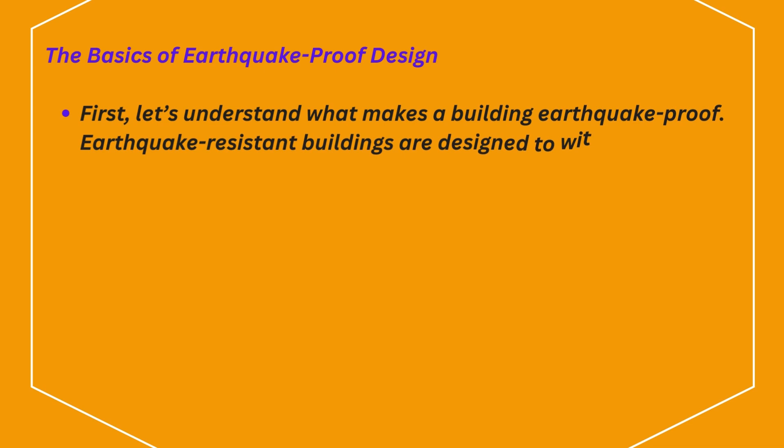The basics of earthquake-proof design. First, let's understand what makes a building earthquake-proof. Earthquake-resistant buildings are designed to withstand seismic forces through a combination of smart engineering and advanced materials. Key features include flexible foundations, which allow buildings to absorb and dissipate seismic energy.

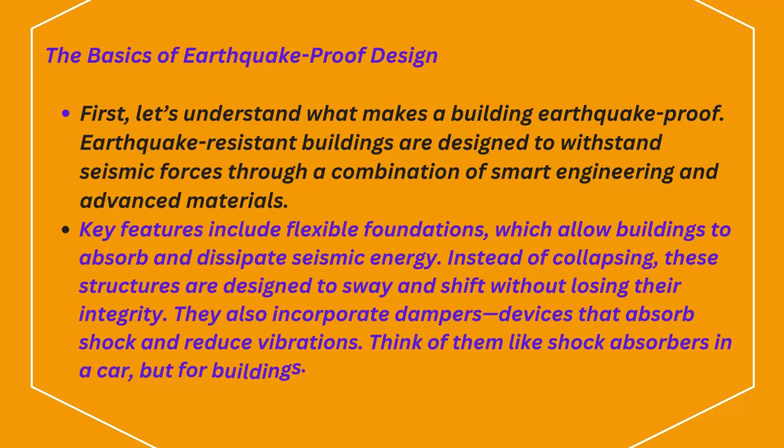Instead of collapsing, these structures are designed to sway and shift without losing their integrity. They also incorporate dampers, devices that absorb shock and reduce vibrations. Think of them like shock absorbers in a car, but for buildings.

Advanced technologies for recovery. But being earthquake-proof is only part of the story. To truly bounce back, buildings must be able to recover from damage and remain functional. Here are some cutting-edge technologies that help buildings recover after an earthquake.

1. Base isolators. These are large, flexible bearings placed between a building's foundation and its superstructure. They allow the building to move independently of the ground motion, reducing the amount of stress transferred to the structure.

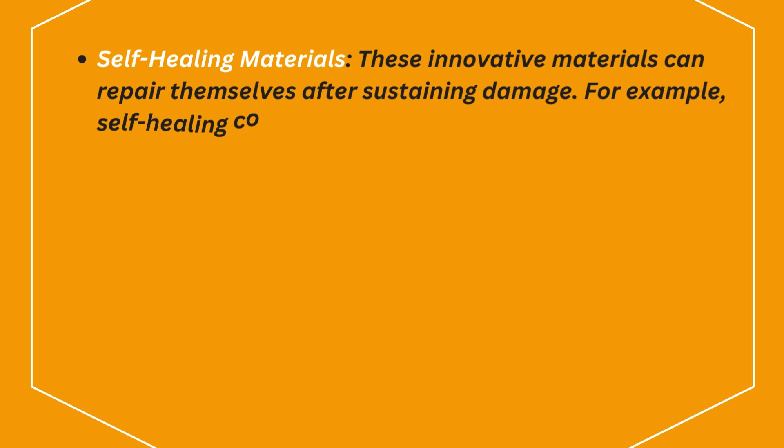2. Self-healing materials. These innovative materials can repair themselves after sustaining damage. For example, self-healing concrete contains special capsules that release healing agents when cracks form, helping to restore the concrete's strength and durability.

3. Post-earthquake reinforcement. Some buildings are equipped with systems that allow for rapid assessment and reinforcement after an earthquake. These systems can detect damage and automatically deploy additional supports or reinforcements to ensure the building remains safe and functional.

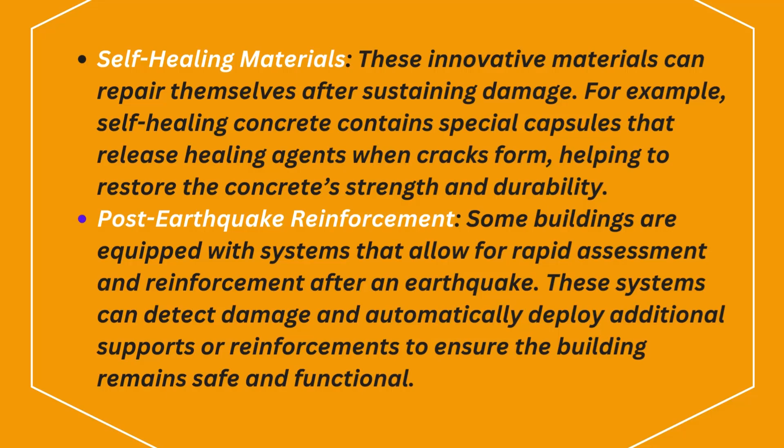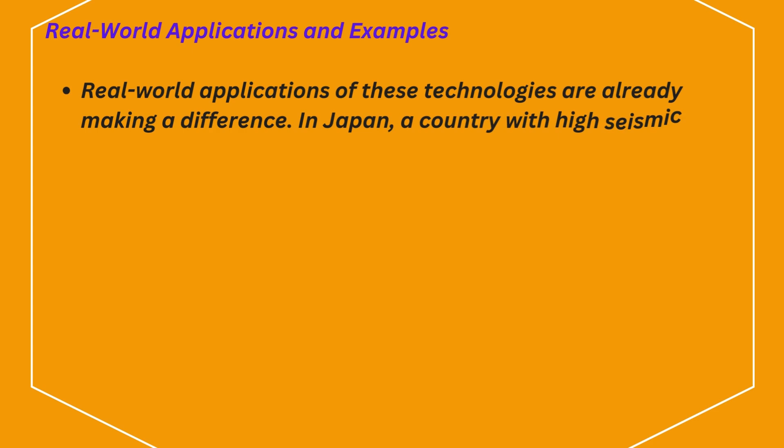Real-world applications and examples. Real-world applications of these technologies are already making a difference. In Japan, a country with high seismic activity, many buildings are designed with base isolators and advanced damping systems. The Tokyo Skytree, for example, is equipped with a massive damping system that helps it sway safely during an earthquake.

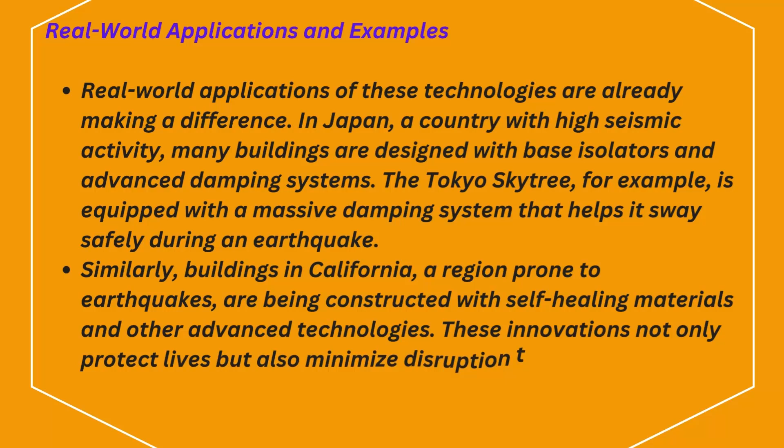Similarly, buildings in California, a region prone to earthquakes, are being constructed with self-healing materials and other advanced technologies. These innovations not only protect lives but also minimize disruption to businesses and communities after a quake.

The future of earthquake resilience. The future of earthquake resilience is promising. Ongoing research is focused on developing even more advanced materials and technologies to enhance building recovery.

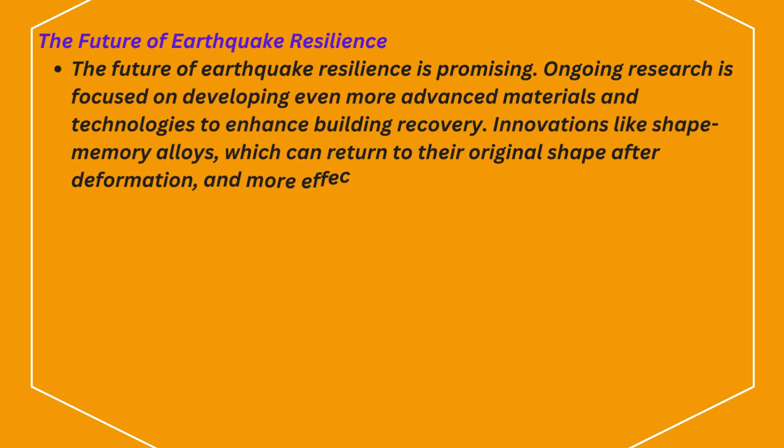Innovations like shape memory alloys, which can return to their original shape after deformation, and more effective early warning systems are on the horizon. As we continue to improve earthquake-resistant technologies, we're moving closer to a future where buildings can not only withstand but also quickly bounce back from the impact of earthquakes, making our cities safer and more resilient.

So there you have it. Earthquake-proof buildings are not just about surviving the quake, but about bouncing back stronger than ever.

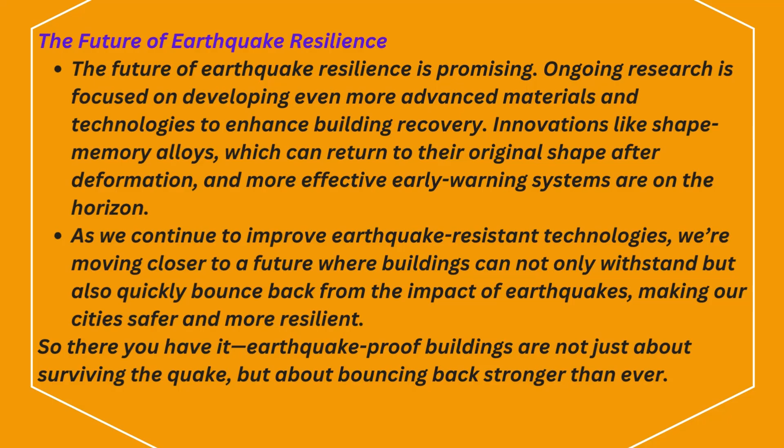Today, we're going to break down the key differences between two popular slab systems in building construction: flat slabs and two-way slabs. Both systems have their strengths and weaknesses, but which one is right for your project? Let's find out. First, let's talk about structural design.

In a flat slab system, the slab is directly supported by columns, without the use of beams. This allows for a simpler and cleaner ceiling design. However, since there are no beams, flat slabs rely on thicker concrete and larger column heads, or drop panels, to distribute loads effectively.

On the other hand, two-way slab systems use beams that connect columns, and the slab rests on these beams. The load is transferred in two directions, both along the length and the width of the slab. The presence of beams means the slab itself can be thinner, but the ceiling design may be less aesthetically flexible due to the beam projections.

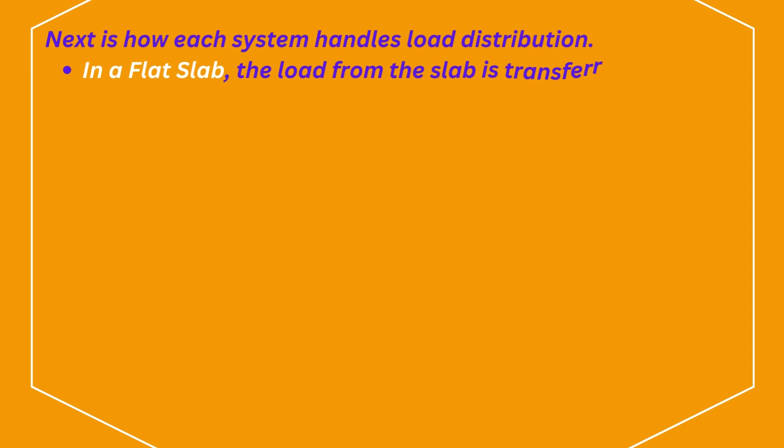Next is how each system handles load distribution. In a flat slab, the load from the slab is transferred directly to the columns. Because of this direct load transfer, flat slabs need to be thicker or require the addition of column capitals to prevent punching shear failures, especially in areas with high loads. This can lead to increased material usage.

In a two-way slab system, the load is transferred across beams in both directions, which distributes the load more evenly. This leads to a more efficient design for handling heavier loads, especially in multi-story buildings or structures with a grid-like layout. Now, let's talk about design flexibility and space utilization.

One of the main advantages of the flat slab is the freedom it offers for open spaces. Without beams, you have more design flexibility for architectural layouts, especially for offices, malls, or parking garages. You can create large, open rooms without the visual or spatial interruption of beams.

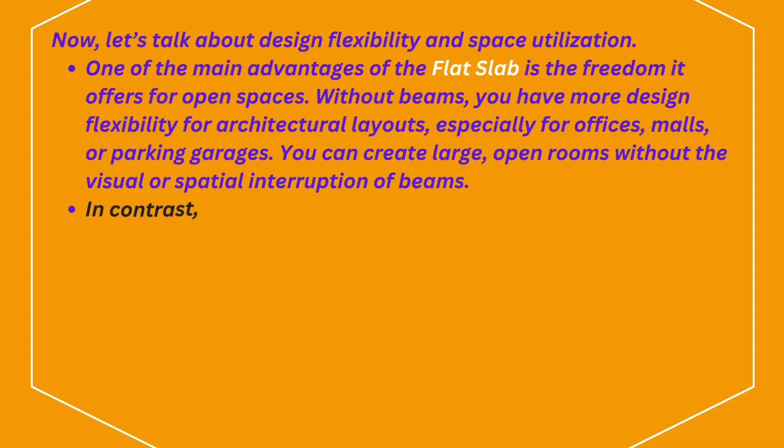In contrast, two-way slabs require beams, which can limit interior space design. Beams create drops in ceiling height and may affect the positioning of utilities, lighting, and partitions. However, the added strength of this system can allow for thinner slabs and a potentially lighter structure overall, which is beneficial in smaller-scale projects or residential buildings.

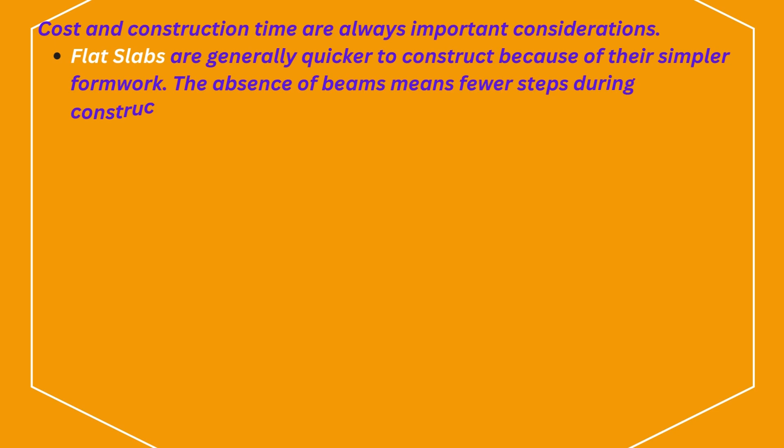Cost and construction time are always important considerations. Flat slabs are generally quicker to construct because of their simpler formwork. The absence of beams means fewer steps during construction, which can reduce labor costs and save time. But remember, the thicker slabs and additional reinforcement may increase the cost of materials.

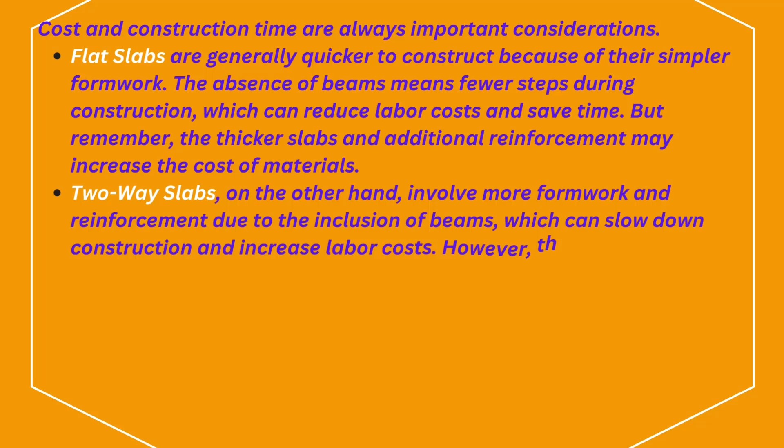Two-way slabs, on the other hand, involve more formwork and reinforcement due to the inclusion of beams, which can slow down construction and increase labor costs. However, the overall material cost may be lower, especially if the beams allow for thinner slabs.

So, when deciding between flat slab and two-way slab systems, it comes down to your project's needs. Flat slabs offer more open space and speed, while two-way slabs give you more strength and cost efficiency in certain designs.

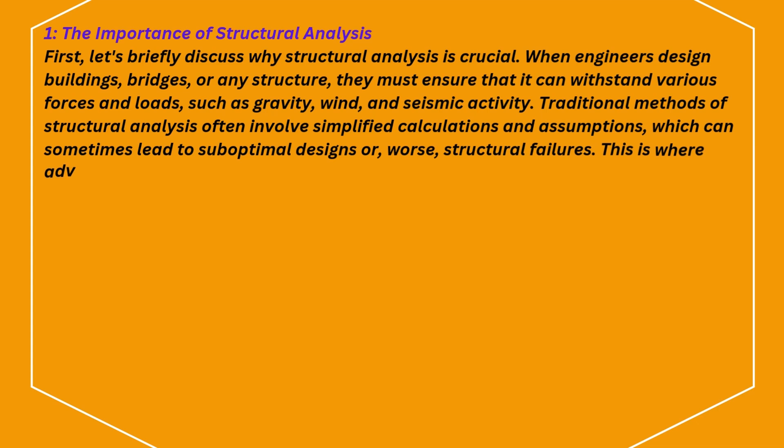1. The importance of structural analysis. First, let's briefly discuss why structural analysis is crucial. When engineers design buildings, bridges, or any structure, they must ensure that it can withstand various forces and loads, such as gravity, wind, and seismic activity. Traditional methods of structural analysis often involve simplified calculations and assumptions, which can sometimes lead to suboptimal designs or, worse, structural failures. This is where advanced simulation tools come into play.

2. What are advanced simulation tools? So, what exactly are advanced simulation tools? These tools include software programs that use finite element analysis, computational fluid dynamics, and other numerical methods to create detailed models of structures. By simulating real-world conditions, these tools allow engineers to visualize how a structure will respond to different forces throughout its life cycle.

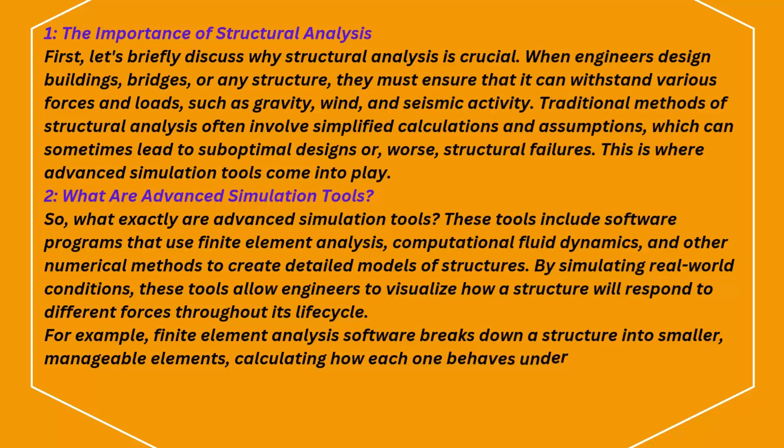For example, finite element analysis software breaks down a structure into smaller, manageable elements, calculating how each one behaves under various conditions. This level of detail provides insights that traditional methods simply cannot offer. 3. Benefits of advanced simulation. Now, let's talk about the benefits of using these advanced simulation tools in structural analysis.

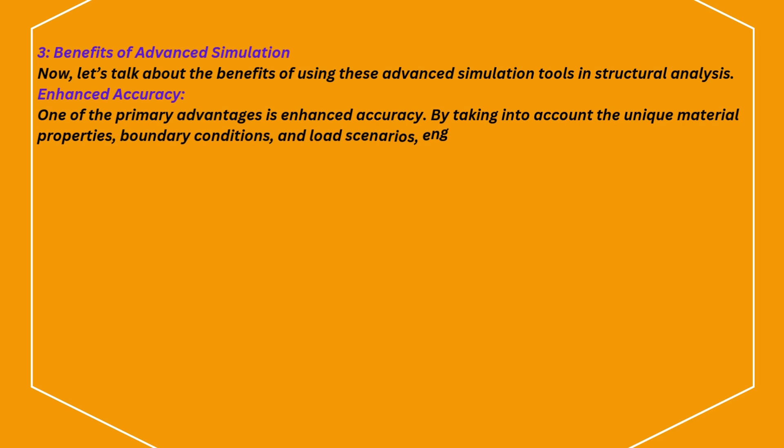1. Enhanced accuracy. One of the primary advantages is enhanced accuracy. By taking into account the unique material properties, boundary conditions, and load scenarios, engineers can make better informed decisions. This leads to designs that are not only safer, but also more efficient in material usage.

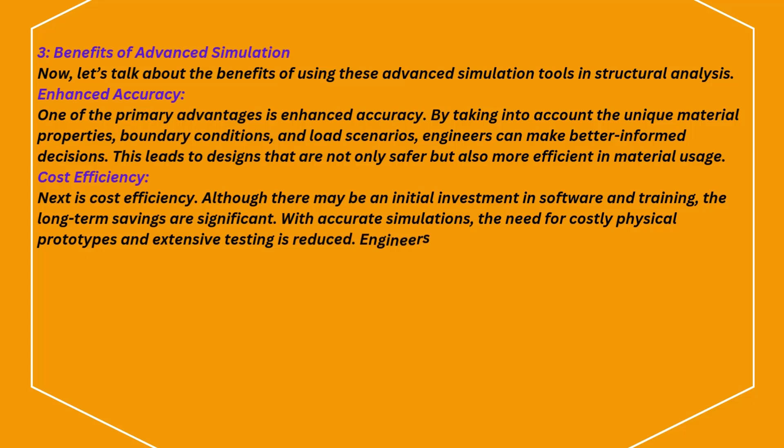2. Cost efficiency. Next is cost efficiency. Although there may be an initial investment in software and training, the long-term savings are significant. With accurate simulations, the need for costly physical prototypes and extensive testing is reduced. Engineers can optimize designs and identify potential issues early in the process, saving both time and money.

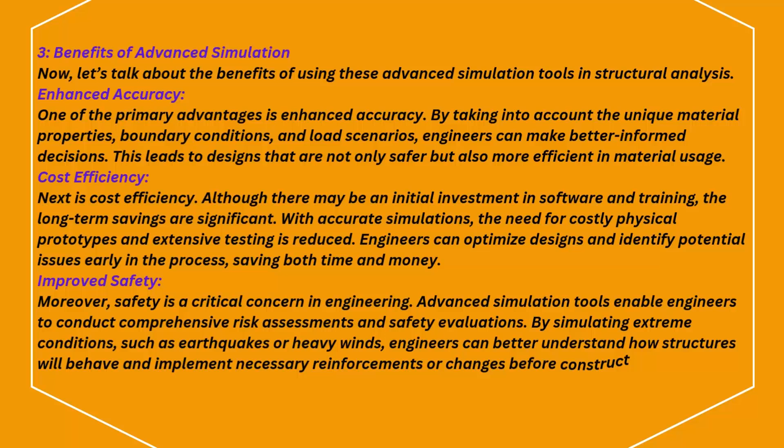3. Improved safety. Moreover, safety is a critical concern in engineering. Advanced simulation tools enable engineers to conduct comprehensive risk assessments and safety evaluations. By simulating extreme conditions, such as earthquakes or heavy winds, engineers can better understand how structures will behave and implement necessary reinforcements or changes before construction begins.

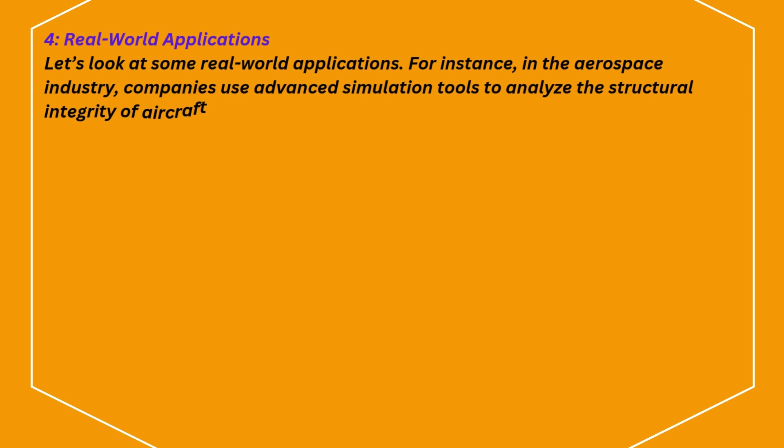4. Real-world applications. Let's look at some real-world applications. For instance, in the aerospace industry, companies use advanced simulation tools to analyze the structural integrity of aircraft components under various flight conditions. In civil engineering, simulations help design earthquake-resistant buildings in seismic zones, ensuring they can withstand potential disasters.

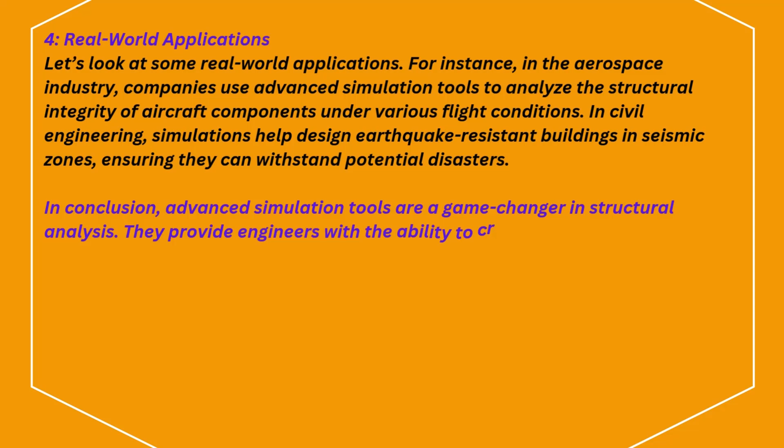In conclusion, advanced simulation tools are a game-changer in structural analysis. They provide engineers with the ability to create safer, more efficient, and cost-effective designs. As technology continues to evolve, we can expect even more innovative solutions that push the boundaries of what's possible in engineering.